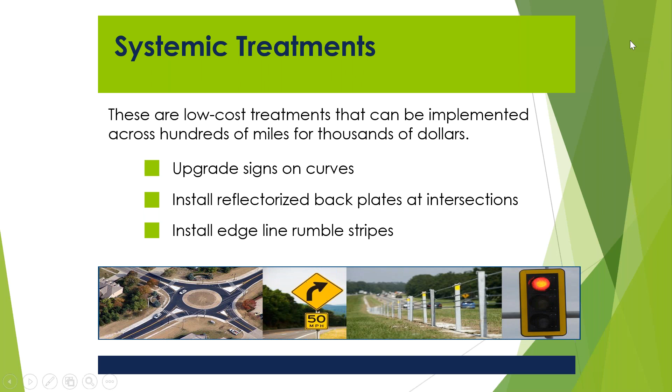And with that, I'm going to hand it off to Ray to go through our first example.

All right, thank you, Jeremy. Appreciate that. A little bit about systemic treatments is that they're part of the Federal Highway Administration initiative called Every Day Counts, and they're up to round 5 of the Every Day Counts, and they call this their FoRRRwD initiative. FoRRRwD stands for Focus on Reducing Rural Roadway Departures. That's one of the reasons we focus on these systemic treatments, especially on our 2-lane rural roads.

Because those are some of the worst crashes that happen out there on our 2-lane rural roads, these roadway departure crashes. If we take a look at some national statistics, the number of traffic fatalities every year is usually around 35,000, and in Ohio recently, I don't think that's the most recent number, but we had 1,083 fatalities one year. I think we're actually over 1,100 last year.

And if we take a look at the rural crashes versus urban, we start to figure out why we need to focus on rural areas, because the number of lane miles in rural areas is actually pretty low compared to our urban roadways, but yet they're responsible for almost half of all roadway fatalities. So they're overrepresented there in the statistics, and that means there's a problem. We need to see what we can do to lower these types of crashes in the rural areas.

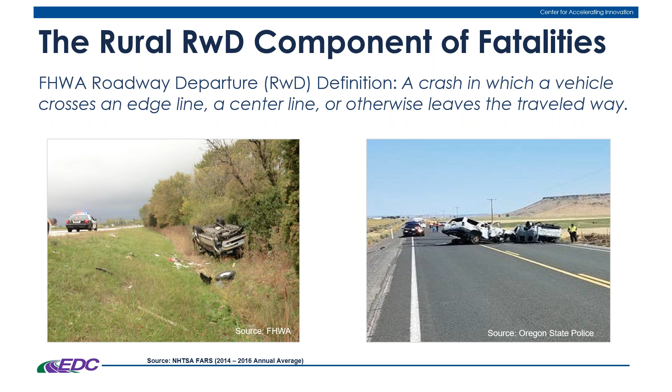So, first of all, what is a roadway departure crash? The Federal Highway Administration defines it as a crash in which a vehicle crosses an edge line, a center line, or otherwise leaves the traveled way. So it's a crash that happened where the car was basically not entirely in their lane of travel, or they've completely left their lane of travel. You see a picture of a rollover crash on the left, and most likely a head-on crash on the right, and those are both listed as roadway departure crashes.

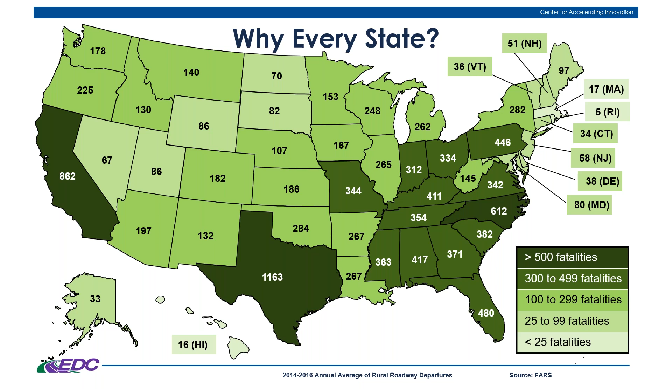Every state publishes a strategic highway safety plan. Ohio calls it the SHSP, Strategic Highway Safety Plan. In that, we list a bunch of goals, but some of these goals relate to lowering the number of rural roadway departure crashes and lowering fatalities and serious injury crashes. And so, this year,

Jeremy's office is going to be publishing a new strategic highway safety plan. You see some of the goals always include reducing the fatality rate by a certain percentage every year, and then reducing the number of serious injury crashes every year, things like that.

This initiative called FoRRRwD has a mission to reduce the potential for serious injury and fatal roadway departure crashes on all public rural roads by increasing the systemic deployment of proven countermeasures.

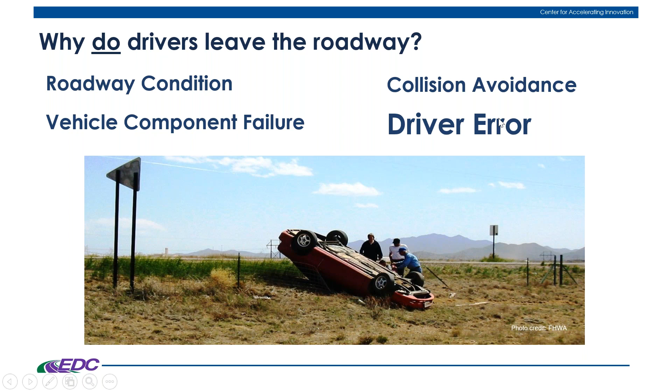And then there's driver error. Look at that, it's bold. It's written in bold. Why do you think we wrote driver error in bold letters?

Let's ask another polling question. This is kind of a personal question, but just remember, we're not writing this down, we're not keeping records of exactly who answered what. So let's ask: has anybody here ever been in a roadway departure crash? And if so, why did your vehicle leave its lane of travel?

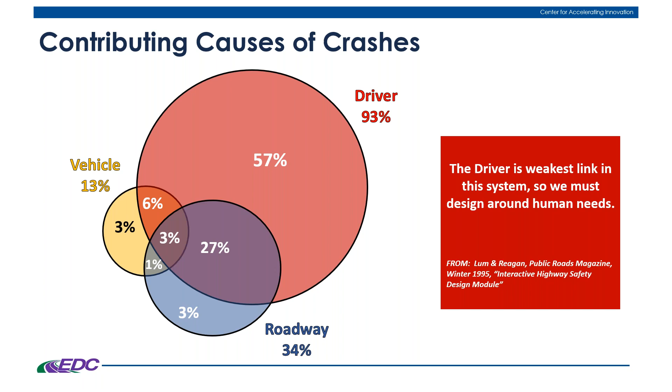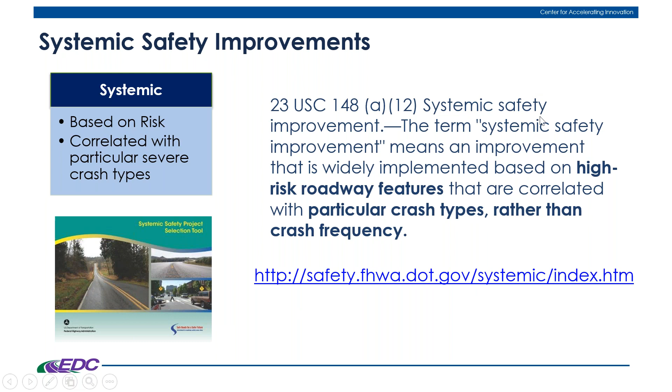So some more about systemic safety improvements. They're particularly applicable when a significant number of severe crashes happen over a wide area. So we're talking about rural roadways, local roadways, specific crash types, curves, or maybe on a highway could be across-the-median type crashes. You've seen treatments on I-270 and other places where we have cable barrier in the medians between the 2 directions of the highway. That's a systemic improvement.

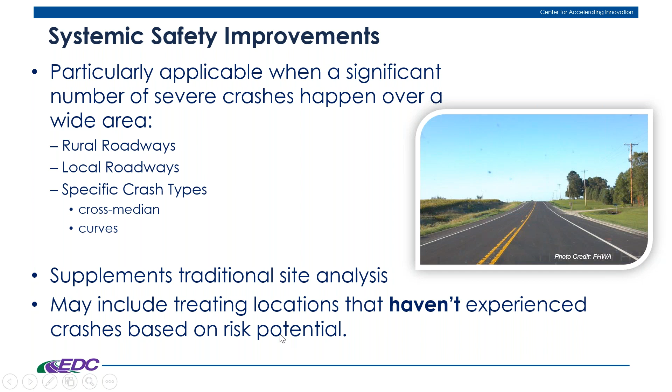So these improvements supplement traditional site analysis and may include treating locations that have not experienced crashes, based on risk potential. In other words, we don't have to wait until a severe crash occurs to make improvements. So as we looked at our data a few slides back, that definitely applies in these areas.

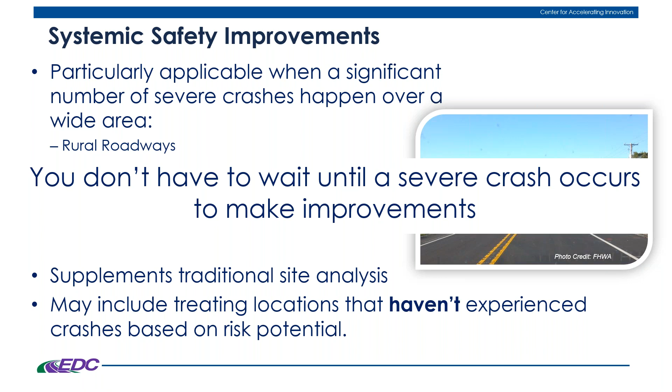So let's take a look at what are high-risk roadway features for roadway departure. We break it down from roadway features to exposure and severity to roadside features.

Some high-risk roadway features would be the width of the lane and shoulder width. If we take a look at interstate roadways, we've got 12-foot wide lanes and very wide shoulders, at least 12 feet or even more. That makes those safe. That's why interstate travel is not the most dangerous road in Ohio. The 2-lane rural road is the most dangerous, as far as the data shows us.

Other things like horizontal curve radius. On an interstate, a horizontal curve is going to be super elevated and very wide, designed for high speed. That's not the case on 2-lane rural roads, whether it be a state route, county road, or township road. We've got some very tight curves, hairpin curves that you've got to slow down to about 10 to 15 miles an hour at most to get through.

The presence of a visual trap—I've got a picture of that coming up to show you what that is. The presence of an intersection: if you're on an interstate, you don't have intersections, do you? You've got interchanges designed for vehicles to merge into high-speed traffic, and there's no angle crashes at those locations like there are on 2-lane rural road intersections.

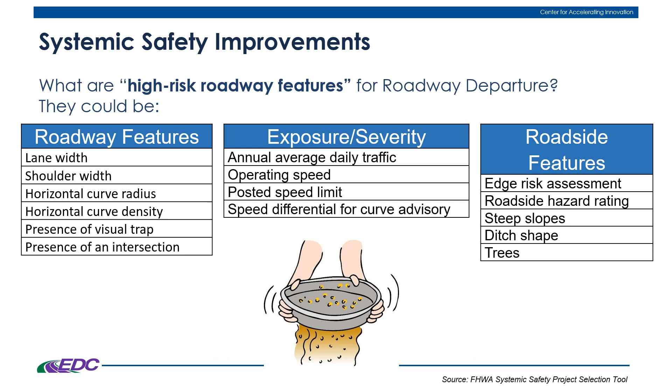There are many places to get your crash data, whether it be from your local sheriff, or you can always get it from ODOT, especially with the GCAT tool. We have our crashes—anytime the OH1 form is filled out because of a crash by enforcement, it immediately goes into our data system.

Maintenance logs—the people that maintain the roadways, when they're called out to fix something because of a crash, they make a note of it and let us know how many times a guardrail has been hit, or a sign at an intersection, things like that. Or roadway safety audits—they make notes of these things as well. So these are all sources of crash data.

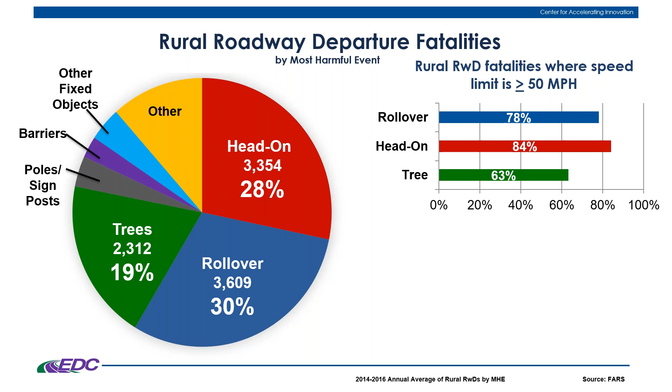If we can put a dent in 77% of these types of crashes, and also focus on rural roads where the speed limit is greater than or equal to 50 miles per hour, and also focus on curve-related roadway departure crashes—this is our objective with these treatments: to focus on these types of crashes and where the roadway speed is greater than or equal to 50, which most state routes, county roads, and township roads are, right? And then focus on curve crashes as well.

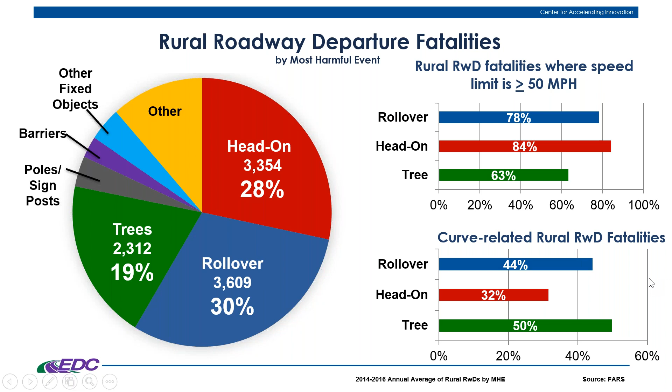One of the things about curves is that, especially in these rural areas, it actually takes some amount of coordination to drive through a curve and totally stay centered in your lane of travel. If we take a look at crash statistics in curves, we would see that most head-on collisions happen in curves because the cars just are not staying in their lane.

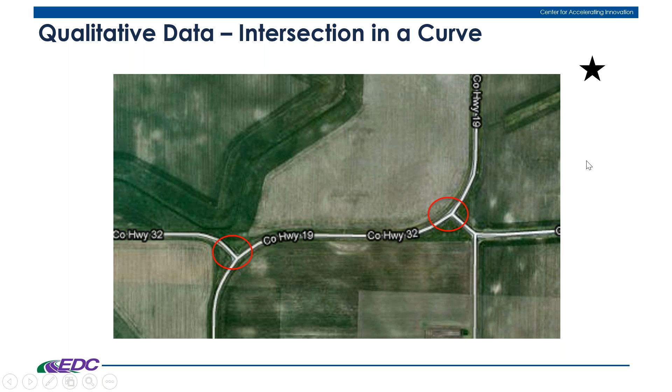This tells us that we need to make sure that we provide advance warning to motorists for the curve, giving them the advance warning sign. It shows the shape of the curve on the sign, and also lets them know if there's an intersection in that curve as well. That's all good information to know, along with the advisory speed for that curve. And also provide guidance throughout the curve from beginning to end, like with chevrons or a large arrow at the apex of the curve.

Okay, I've gone through a lot there. I don't want anybody to doze off on me. So let's have another polling question.

So when it comes to rural roadway departure crashes, you guys tell me which of these crash types are included in the definition of a roadway departure crash. There are multiple answers, so you can select more than one.

We're at about 40%, Ray. Okay. It's clear majority though. And you can't select more than one answer, Ray, because... oh, please, okay, select one. All right, thanks, Tom.

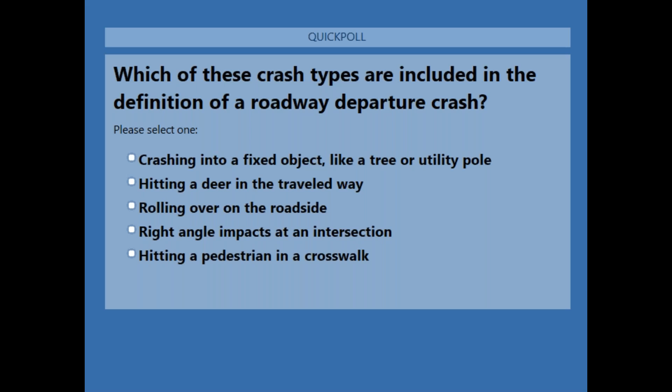So 69% are voting... here, let me share. 69% are voting crashing into a fixed object like a tree or utility pole. 2% hitting a deer — we know who hit the deer. And then 29% rolling over on the roadside.

All right, I should have given you a heads up to make that multiple choice, but A is definitely a roadway departure crash. You have to leave your lane of travel to hit a tree, right? Hitting a deer in the traveled way, we're going to say that's not a roadway departure crash — you hit that while you're in the lane. Rolling over on the roadside is a roadway departure crash because you're off the road, right? The right angle impacts at an intersection, that is not a roadway departure crash. Hitting a pedestrian in a crosswalk is not a roadway departure crash. So A and C were both correct.

All right, good job. That one said in the crosswalk is, but it's really not. Oh, that's because I deleted an answer, so don't pay attention to that.

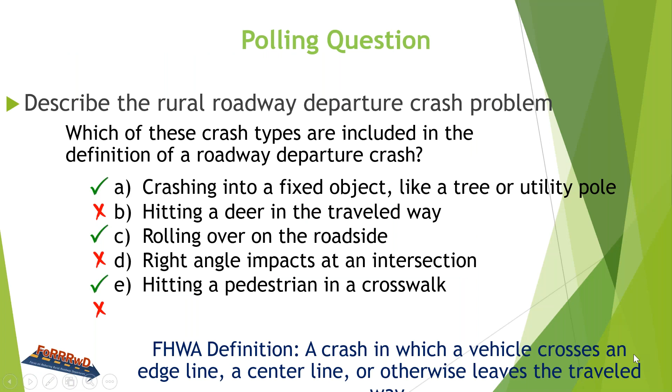Okay, so again, the definition is — whoops — a crash in which a vehicle crosses an edge line, a center line, or otherwise leaves the traveled way.

And so we have specific treatments for each one of these objectives. So for number 1, to keep vehicles on the road, our systemic treatments include curve signage, proper pavement markings on the road, high friction surface treatments, and rumble strips, either on the center line or edge line, or even transverse rumbles to alert people of an upcoming intersection or something.

So those are all systemic treatments that we install to keep vehicles on the road, and then to reduce the potential of crashes, so they've left their lane. One of the things we like to do is provide shoulders on the roadway. There's a lot of county and township roads that basically have no shoulder. Providing a shoulder helps, and the Highway Safety Manual shows us that even a 1 to 2 foot wide shoulder is better than 0. And it goes up to anything over 6 feet in rural areas, which provides substantial reduction in roadway departure crashes.

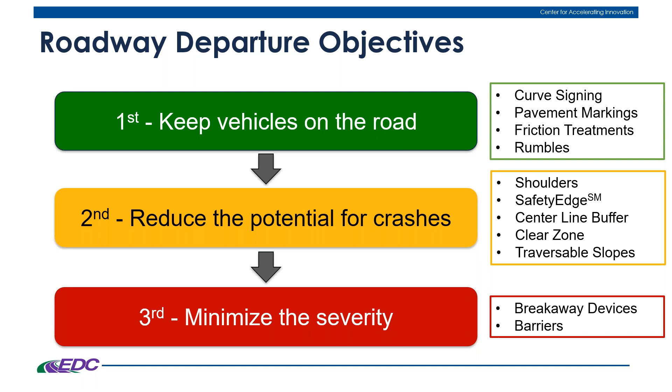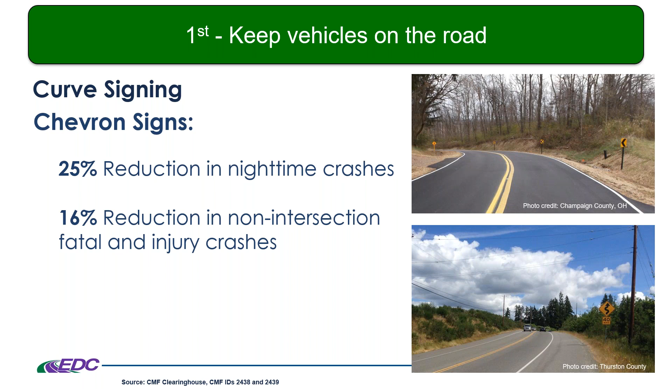So let's take a look at some of these treatments. We have our curve signage as part of our first objective of keeping vehicles on the road by putting in chevrons. Very cheap, very low cost, but if you put in the latest design of chevrons like you see there, just putting them up gives us a 25% reduction in nighttime crashes and 16% reduction in non-intersection fatal and injury crashes. It's a pretty good bang for our buck in reducing these types of crashes.

How about edge lines and center lines? I'm sure some of us live on county roads or township roads that have never seen pavement markings, but that doesn't mean they can't be put out there. Just by adding edge lines or center lines, we have a 24% reduction in rural injury crashes. And by putting 6-inch wide edge lines throughout curves, we have a 13% reduction in nighttime injury crashes.

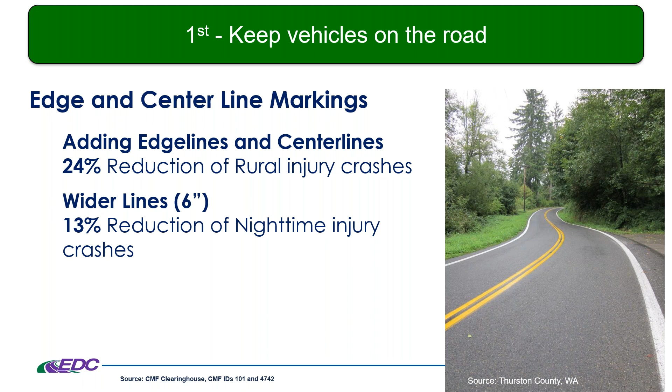Another thing we have is high friction surface treatments.

The difference between an interstate roadway curve and a rural road curve is that a lot of rural roads have no super elevation. Without super elevation, the only thing left to hold the vehicle on the road is friction. If you've gone several years, 7 or 8 or more, without resurfacing, the roadway starts to lose its friction value. Providing a high friction surface treatment is a low cost treatment that provides a really good amount of safety, keeping cars on the road.

It's been studied, and we got 52% less wet road crashes. You also see this treatment on ramps on highways. When I was at the City of Columbus, we had a problem with certain ramps along 270 where 18-wheelers would tip over on these curves.

It was studied and shown that before the rollover occurred for these semis, they'd actually go into a skid and then roll over. So the theory was let's reduce the skid, let's prevent the skid with high friction treatments, and it actually really worked - 86% less of that occurrence happening. Also 24% total crash reduction in curves and 35% less total crashes on ramps. So it's a very low cost treatment, just apply that in the curve.

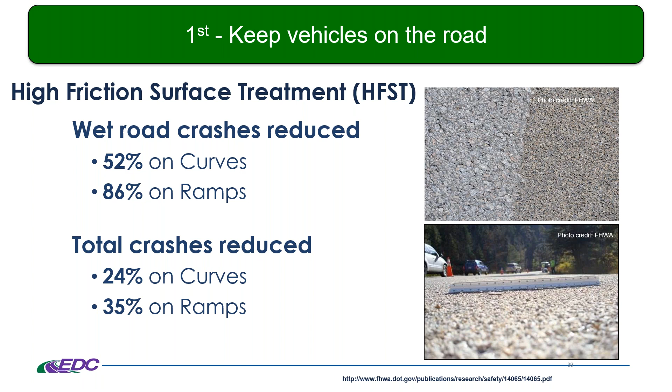We also have edge line and center line rumble strips. You used to see these just on 4-lane highways, but now you see them on 2-lane rural roads. That's because they provide a lot of crash reduction for as cheap as they are. Plus, we've recognized that rumbles are really one of our very few tools to combat distracted driving.

If your drivers are updating their Facebook page and texting and taking their eyes off the road to do that, if they hit the rumbles, that's their last chance to focus on the road and get back in their lane. So we have single vehicle run-off-the-road fatal and injury crashes reduced by 13 to 51%, depending on the area. Different studies are showing up to 51% reduction in that sort of crash happening.

The centerline rumble strips work on head-on, opposite direction, and sideswipe fatal injury crashes, reduced by 44 to 64%. So with that sort of data, if your 2-lane rural road doesn't have these, I can probably bet that they will in the future.

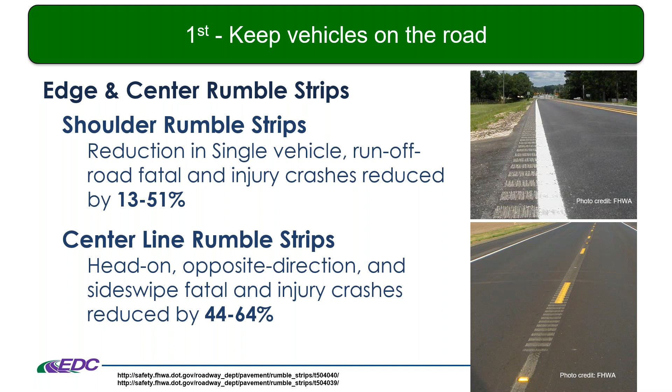Here's some data from the Highway Safety Manual, the AASHTO Highway Safety Manual, that shows what adding shoulders to a roadway can do for us. If you go from a 0-foot shoulder to a 2-foot shoulder, that gives us a 13% crash reduction. As the shoulder gets wider, the crash reduction gets higher as well. So it turns out that shoulders along roadways are pretty important if we've got the room to install them.

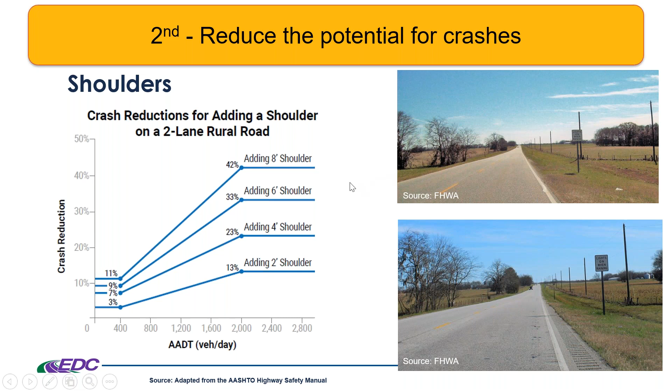We talked about in part 2 of this webinar series that adding shoulders to a rural road was one of the projects that we discussed.

Then we have the safety edge treatment. It's a tool that you add to the paver, and it creates this 30-degree angle on the edge of the pavement, as you can see on the right. It's got more than just the benefit of reducing crashes - it also prevents the pavement from raveling, as you see in this left picture.

It has a reduction factor of 34% for drop-off crashes, 19% less head-on crashes, 21% run-off-the-road crashes, and an 11% drop in fatal and injury crashes overall. Basically, you can do this without additional cost to your resurfacing project, so why not do that? We're trying to make this a standard on all 2-lane rural roads in Ohio, so it's just something you can talk to your contractor about.

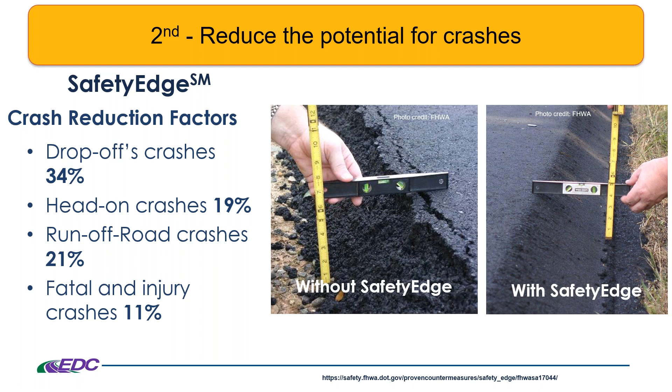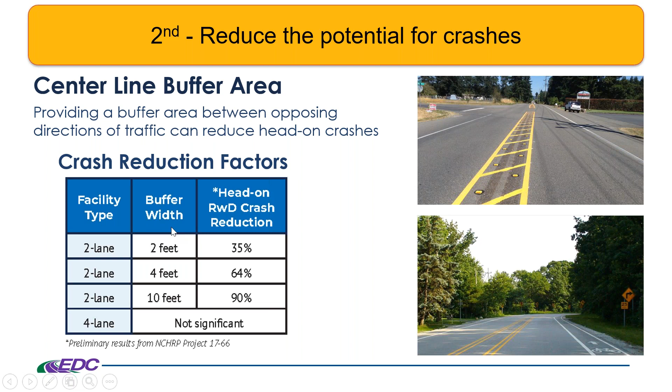And the wider you get, the more reduction of that type of crash.

Adding a clear zone, if that's possible. The clear zone is defined as the unobstructed traversable area provided beyond the edge of the through traveled way for the recovery of errant vehicles. There's a good picture of what a clear zone would look like on the right, and you get different crash reduction value the wider you go.

So you've got 3.3 feet here - maybe you can remove these trees to get 16.7 feet. That gave a 22% crash reduction, and up to 30 feet was 44%. So you can evaluate this for different widths on your road for different crash reduction potential.

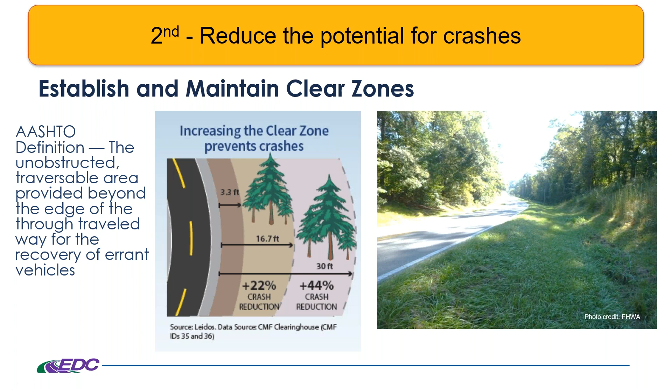Then we have traversable roadside slopes. Whatever the grade is for your roadside slope, it gives you a crash reduction potential.

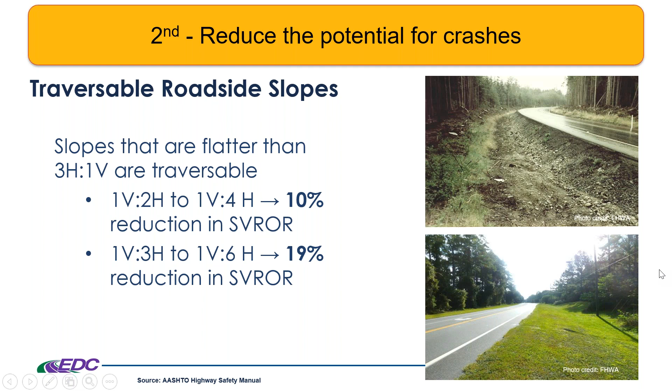Obviously, that top right picture looks pretty dangerous, doesn't it? That's pretty scary, it looks like something out of a horror movie. But the bottom right picture definitely shows a much safer traversable roadside slope.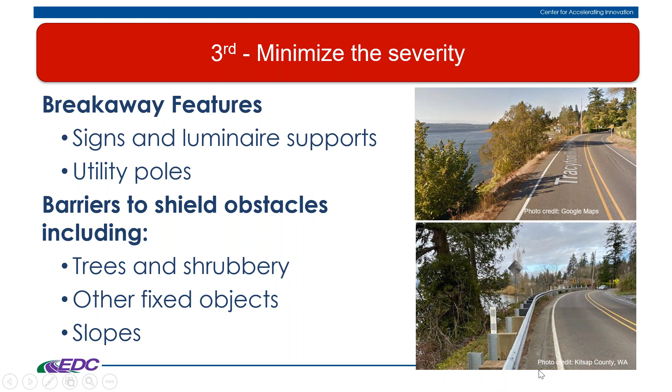Then we go into part 3, our third objective: to minimize the severity of crashes. We can do this with breakaway features on our signs and luminaire supports, utility poles, and barriers to shield obstacles, including trees and shrubbery, other fixed objects, or slopes. The top image showed no barrier, and then we have a proper barrier here on the bottom right.

So that's enough about what we have as far as systemic safety improvements, some of the things that we do. Let's get to talking about a couple of our systemic projects that we have done here in Ohio.

One is from my office, but we use safety funding to make this happen, and that is our Township Safety Signage Upgrade Grant. At the Ohio LTAP Center, we're providing funding, a grant, meaning no money out of pocket for townships, so that all 1,308 townships will have the ability to get all of the signs they're supposed to have according to the Ohio Manual of Uniform Traffic Control Devices. That in itself will reduce crashes on their roads.

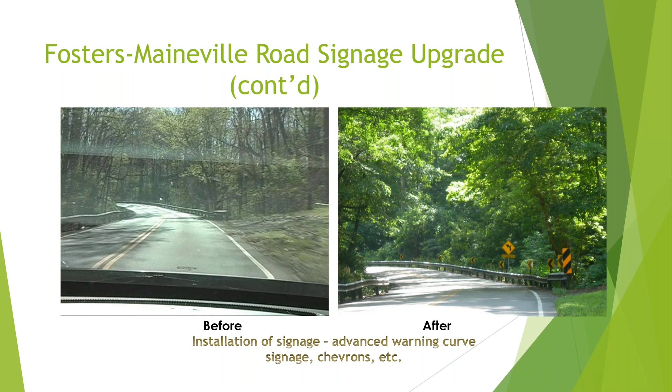This curve here on the left basically had no signage. On the right, you see that they got the proper barrier marker to begin things off with, and then the proper chevrons, and the shape sign to let the driver know the shape of the curve, and also that there's an intersection in that curve. A lot of crashes were happening at that intersection because motorists just didn't know it was there. Here's a picture of a curve.

A little bit more about who's eligible. We provide all the materials, 100% covered in cost, but they commit to installing them, so there's no money out of pocket for the townships.

The township gets certified as part of the training, where we train them on what to expect and how to get through this process. We do this every year, and we want those signs installed within one year of receiving them, though we sometimes grant extensions for due cause. We also allow them to purchase signage for the villages located in their township.

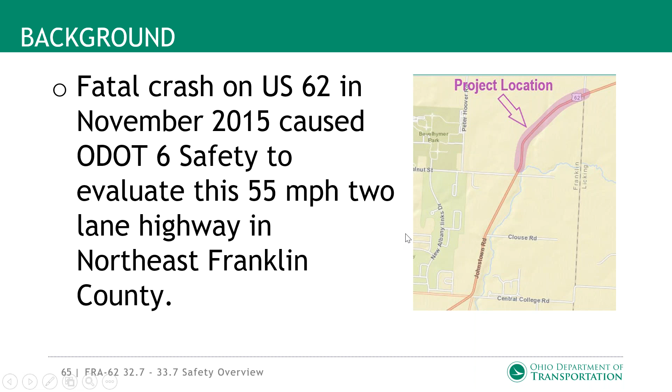I think we skipped a slide there. You skipped one? Skipped a couple, should we go back another? Yeah, you want to talk? Actually skipped a bunch, did I go out of order? Okay, go back up. Wait, so background, okay, background, crash analysis.

So on the crash analysis that we ran, we did January 2012 through November 2015. There were 25 total crashes, 15 northbound and 10 southbound. Curve 1 had 4 crashes, 3 northbound and 1 southbound. Curve 2 had 5 crashes, all northbound. Curve 3 had 4 crashes, all southbound.

Most of the curve crashes were wet or snow related, and most of the injuries were in curves 1 and 2. The segments outside the curves accounted for 12 of the crashes, 7 northbound and 5 southbound, consisting primarily of passing and running off the road.

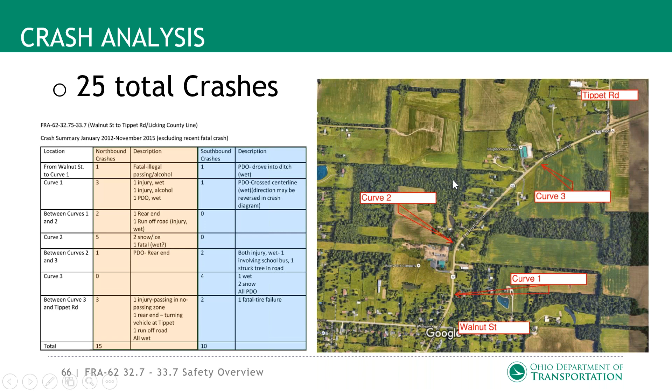So you had some fatal crashes out there, at several of these curves - we had 4 of those. The one in curve 3, towards the top, was a vehicle that lost its wheel, so not really a roadway deficiency as much as an equipment failure. That lower left corner is the crash that kind of brought on the complaints in that center curve.

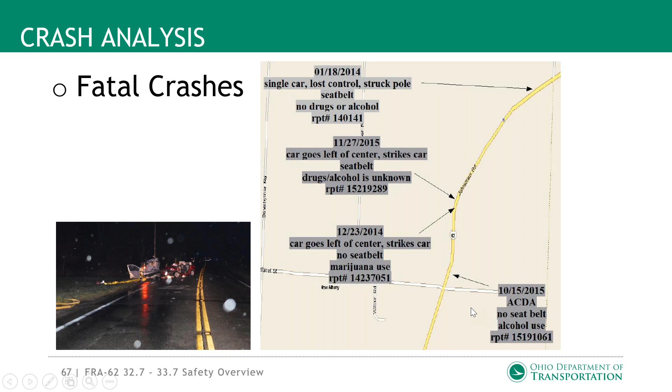So next, we did a field review starting at curve 1 to the south, then working our way up to curve 3 to the north. We did the field review in December 2015, and what we saw was curve warning signs, advisory speed 35 miles an hour, and chevrons. So it had plenty of signing out there.

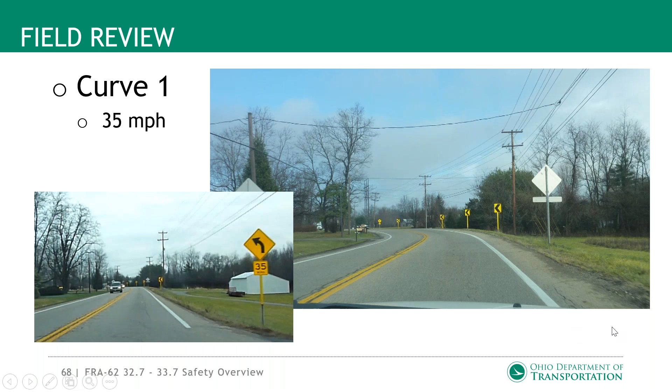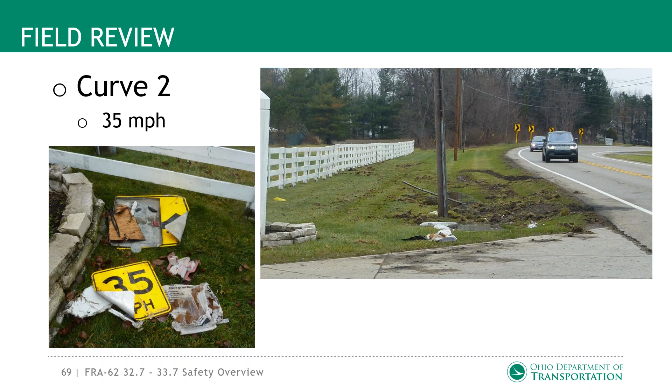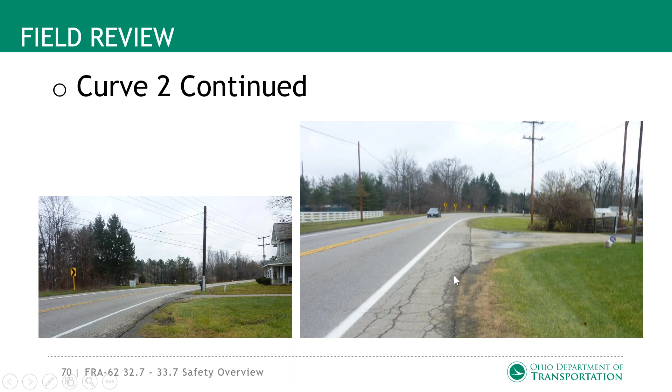Curve 2 had curve warning signs - again, that's the remnants of another crash that had happened out there just prior to the field review. It had curve warning signs, advisory speed of 35 miles an hour, and chevrons. Toward the inside of the curve there are some utility poles and a driveway. We evaluated if drainage could have been a problem, but when we observed it during rain events, we didn't find water coming onto the roadway. You can see there's really not much of a ditch there. We saw standing water in that drive, so we weren't sure if there was some kind of water encroaching onto the roadway that was contributing to any of the problems.

So curve 3, this is looking southbound towards curve 3. It had an advisory speed sign, curve warning sign, advisory speed 45 miles an hour. There were no chevrons on that particular curve.

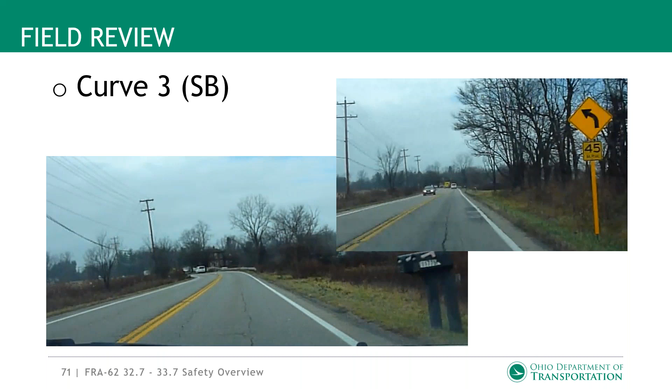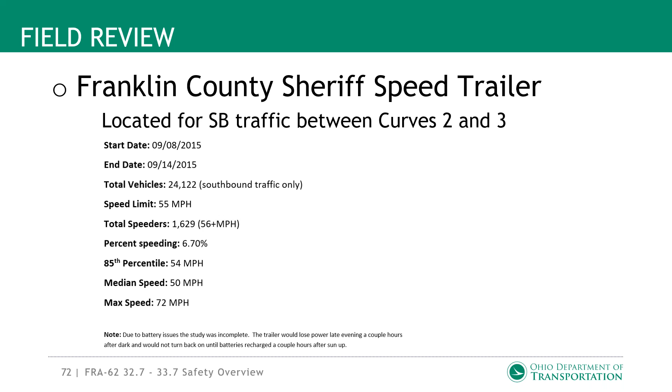Franklin County Sheriff was also concerned about the problems out there - they had complaints too. So they set up a speed trailer southbound between curves 2 and 3 for a week in mid-September 2015. There were some battery problems that caused some night detection to fail, but for the most part it did a pretty good job of picking up data. The readings showed about 7% speeding, 54 mile an hour was the 85th percentile, 50 mile an hour was the median speed, and maximum was 72 miles an hour. And again, this is a 55 mile an hour speed limit out here.

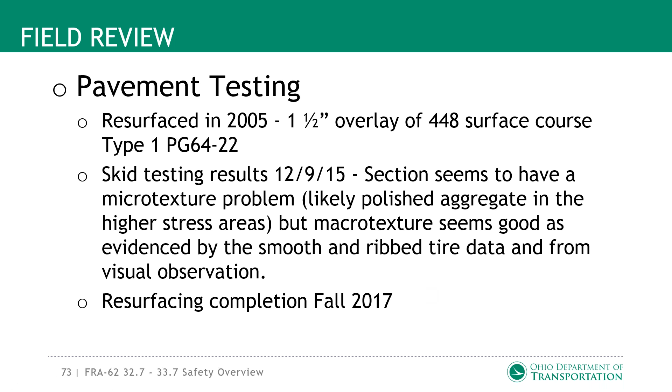Because we had a lot of run-off-the-road crashes on the curve, we requested some skid testing and pavement testing from ODOT Tech Services. In December 2015, they completed their test by the 9th of December - we asked for the test and about a week later we got the results. You can see some of the results there, which showed some polishing detected in the pavement. We had a resurfacing coming up in 2017.

So we did some ball bank tests on the curves. For curve 1, it came out to a 45 mile an hour advisory speed - curve 2 was correct, and curve 1 was originally signed at 35. Curve 2 was correctly signed at 35 miles an hour, and curve 3 was 50 miles an hour, so curve 3 was actually slightly higher than what the advisory speed showed. There are no chevrons for curve 3, but with the current advisory being 10 miles an hour less than the posted speed, chevrons are an optional sign.

So most of the curve crashes had possible contributing factors of insufficient friction that we saw from the pavement tests. The speeds were somewhat high based on what the sheriff had found. And there was also illegal and unsafe passing that was contributing to some of the sections between the curves.

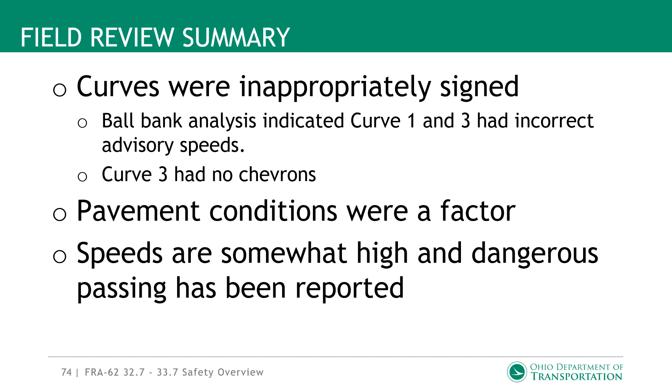So we came up with some recommended countermeasures for the short term, something to get out there as fast as we could to try and address some of the problems. We looked at the signing, and we looked at putting in oversized curve warning signs, advisory speed plaques, and chevrons. That was like one of the questions we heard earlier about oversized signs. If you have the signs out there and you still have issues, you can go to an oversized sign.

Also, freeway and interstate signs tend to be larger. That's an option you always have, to go up to a larger size sign, and that's what we decided to do here, since we already had the signs and were still having some crashes, so we went to oversized. We also requested fine milling to be done on all 3 curves, which is just a grinding operation of the pavement to try and improve the friction. Some downsides to fine milling are that it can polish over time, so it's often considered a shorter term fix, but that's what we were looking for here anyway.

And then there's also enforcement with message boards that we had set up, warning and giving people advisory warnings. Franklin County also did an enforcement blitz on this section of roadway.

For medium term, we looked at improving the friction, particularly on curve 2, with microsurfacing. We had a resurfacing project scheduled in 2017, so we modified the plans to provide for some special paving to be done there with microsurfacing. I'll show a little bit more of that later. We are also doing centerline rumble stripes to help with illegal passing and crashes between the curves, and we also put in for 6-inch edge lines, which are now the standard. At that time, that was just an optional treatment, but we put in for the 6-inch.

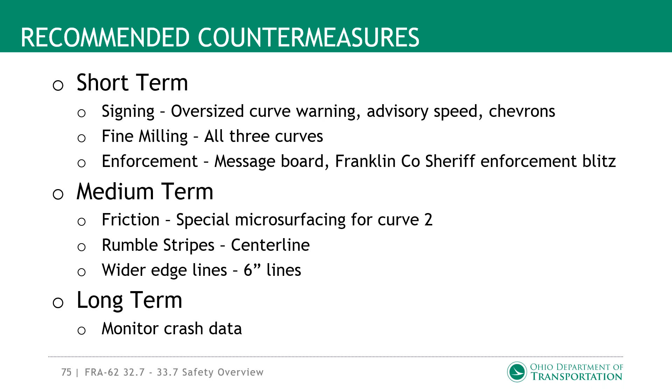And then for long term, we're just going to monitor the crashes to see if what we were doing out there was being effective.

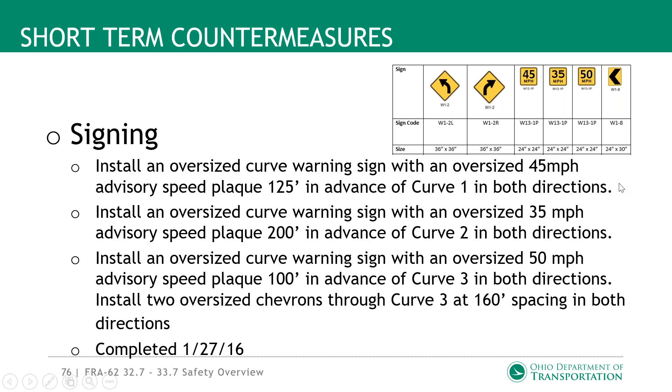So again, for the short term, we went with the oversized signs, and you can see the signs there, with the oversized dimensions that we had. We went with 45 miles an hour advisory speed plaque, 125 feet in advance of curve 1, the oversized curve warning sign with 35 miles an hour in curve 2, and the oversized curve warning sign with 50 miles an hour in curve 3. We installed 2 oversized chevrons through curve 3 at 160-foot spacing, and that work was completed by the end of January 2016. We had done some of the testing in December, and then had the signs up by the next month.

The fine milling operation was a collaborative effort between BOCA, the contractor, and ODOT. ODOT did the maintenance of traffic control, dump trucks, and that sort of thing. BOCA had the equipment to actually do the grinding, and they went out and completed that work by January 2016.

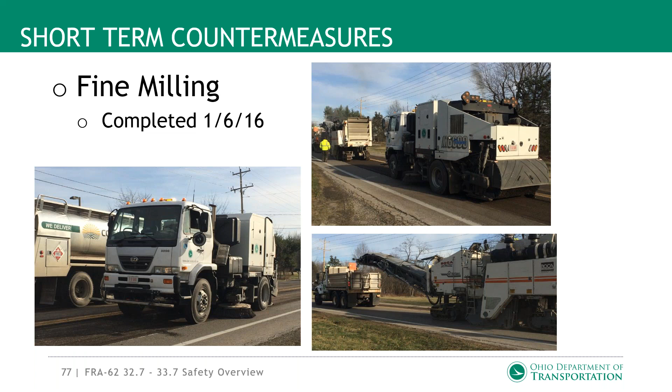The enforcement blitz resulted in 165 stops, 18 speed citations, and 133 warnings. And we had the message board placed out there from mid-December 2015 through the early part of January 2016.

What did the message board say? The message board was saying it was an enforcement zone. Kind of like the permanent signs you see out there saying this is a target enforcement area, it was that same type of message, but just on a portable message board. It was just warning people that this was a targeted enforcement area and to drive safely, that type of thing.

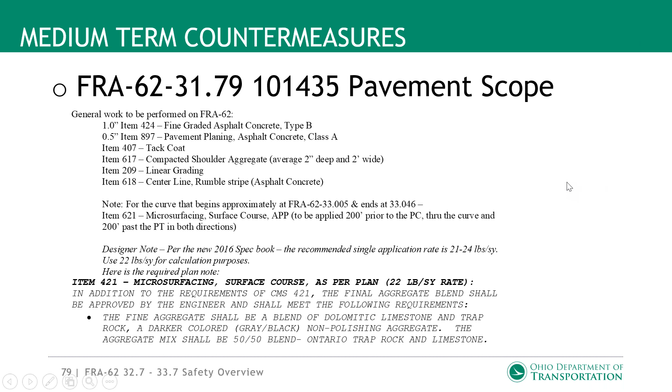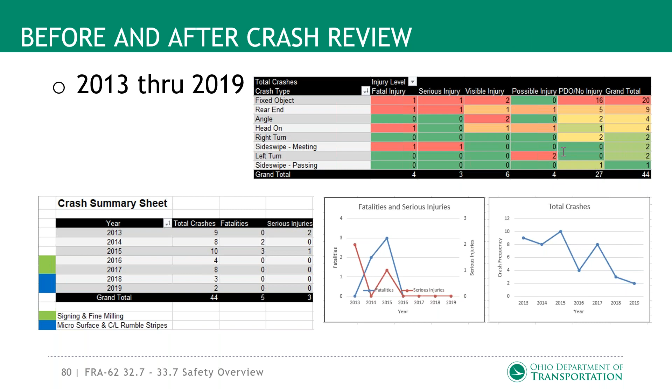So in summary, there's a lot of partnering and coordination between agencies. It was between ODOT and the sheriff's office and even some local groups. We had to set up a sign on private property, so there was a lot of assistance on that sort of thing. We had viable short-term strategies that really worked until we could get the medium term put into effect.

And you can see the results of the medium term strategies have been effective. We took the overall crashes and cut them to less than half. And of the 8 serious injuries and fatalities prior to the improvements, we've had none after that. I've gone back and checked even up to current, and we still have had no injuries or fatal crashes out there after the effect.